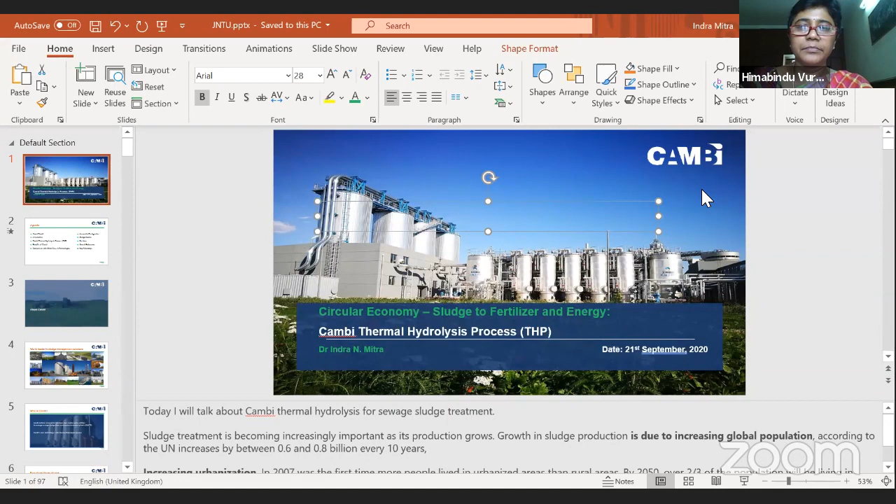Today's topic that I will be talking on is circular economy, sludge to fertilizer and energy. I will be mainly talking of Cambi thermal hydrolysis process. I work in this company as director, technical and project development.

Today's agenda: I'll start with a brief introduction, then we'll talk about Cambi thermal hydrolysis process, the benefits of Cambi, and compare Cambi technology with other technologies in the same field. We'll talk about anaerobic co-digestion, sludge centers, the services we provide, references, and key takeaways from this presentation.

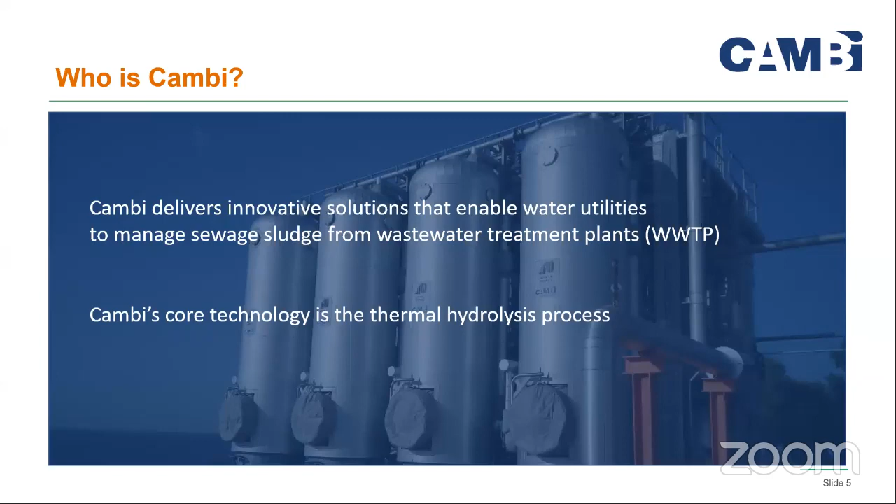Our core technology is thermal hydrolysis. Our work contributes to achieving 8 of the 17 United Nations Sustainable Development Goals. We are present all over the world, mostly in Europe and UK, with a lot of plants there. We process about 50% of sludge of UK. We also have plants in US, China, Singapore, and we are planning to come up with plants in India.

We won several awards, and among the top 3, we have been adjudged as the top 3 technologies of the decade in the wastewater space. We won the WEX Global Award in 2020, and we have been selected by the ETV program by Namami Gange in India.

Our headquarters is in Asker, Norway, and our workshop is in UK, and we have about 7 offices worldwide, mainly in Norway, UK, Spain, France, USA, China, Singapore, and South Korea. We are going to set up one in India.

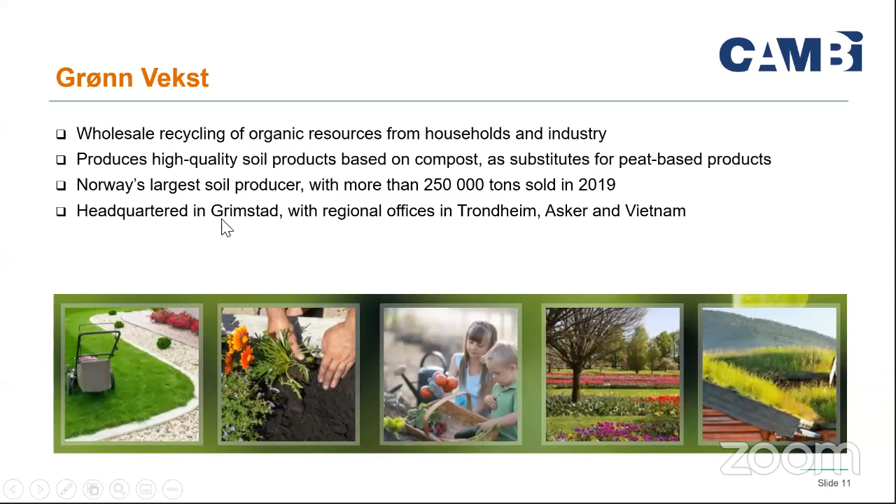Besides, Cambi also has a sister company, previously known as Hearst, now renamed Grønn Vekst. It works in converting waste into fertilizer, and it's Norway's largest soil producer, headquartered in Grimstad, Norway.

Sludge treatment is becoming increasingly important as its production is growing, mainly due to increasing global population, which according to the United Nations increases by about 0.8 billion every 10 years. The population in urban areas is increasing at an alarming rate, putting a lot of pressure on wastewater infrastructure in cities, so we have to build a lot of wastewater and water treatment. The sludge from wastewater treatment needs to be processed in the right way so we can recover all the resources from it. So you will see tremendous growth in the sludge sector.

There is a trend of increasing urbanization. In 2007, for the first time, more people lived in urbanized areas than rural areas. By 2050, we estimate about 2/3 of the population will be living in cities, leading to increasing expenditure in wastewater treatment infrastructure, especially in Asia and the developing world.

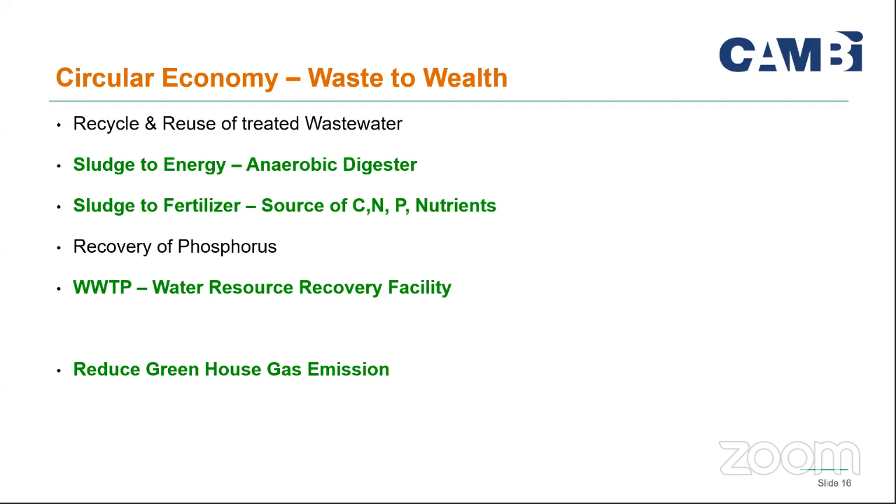One is in the wastewater sector. I'm talking about recycle and reuse of treated wastewater. You can treat your wastewater to a level where you can recycle and reuse it for different purposes like toilet flushing, gardening, cooling tower makeup in industries. Many plants in India, sewage treatment plants, are treating wastewater and giving it to industries. Also, I think the power plants are mandated to use recycled wastewater for their water needs.

So there is a lot of steps going on in India. Sludge to energy, anaerobic digester is a big thing where we convert the organics or the sludge into biogas, as I said before, and we can recover energy from there.

Then sludge to fertilizer. So far we have had a problem with sludge, and we were either landfilling it or not disposing of it the right way. We were giving it to the farmers, which is actually not healthy. I will discuss that in detail a little while. But if we can convert the sludge into fertilizer, then we can sell it.

This is where Cambi technology comes in, and it converts your sludge to fertilizer, and at the same time increases the energy production from the sludge in the anaerobic digesters by 20 to 50%.

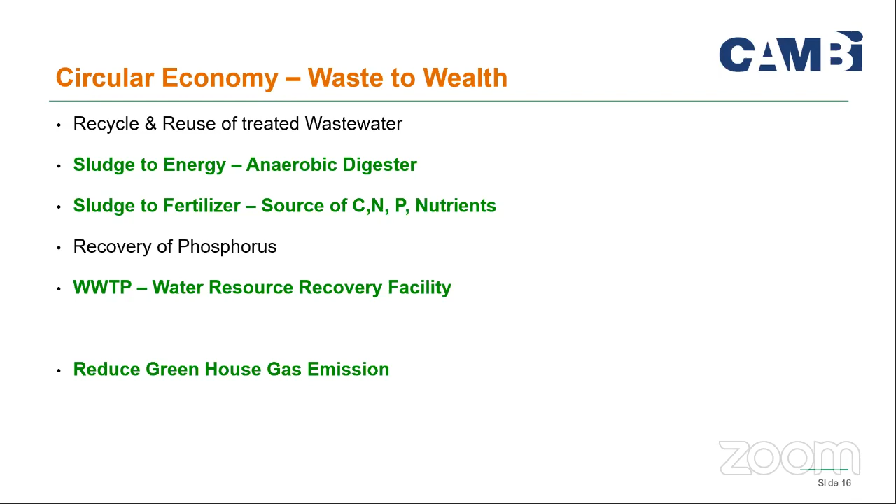DC Water is the municipality that handles Washington DC, and they have done extensive studies over the years, evaluating different technologies, involving a lot of universities. Virginia Tech was involved, George Washington University was involved to do a lot of pilot studies. And then ultimately, of all technologies, they selected Cambi THP.

The DC Water Program team is reinventing biosolids at this 391 MGD Blue Plains Advanced Wastewater Treatment Plant in Washington, DC, and has installed the first Cambi thermal hydrolysis process in North America. Today we have the eighth plant - we just got the order for that at WSSC in Maryland.

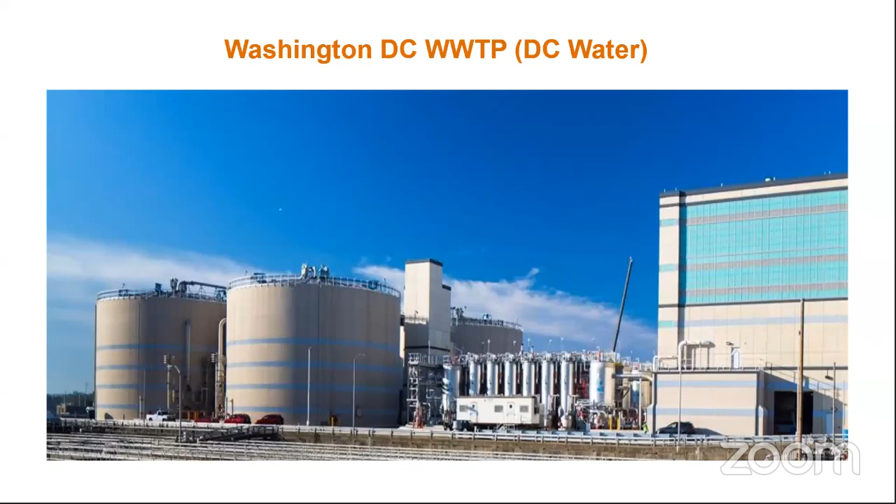Now sludge, as we know, we treat it, but then to what level we need to treat sludge and how to dispose it. It is governed by EPA biosolids rule. This rule is followed in USA, and many countries are following this rule, including India, where the new tenders that have come in follow the biosolids rule.

Just to give you an overview, this rule is applicable mainly for sewage treatment plants. The sludge, as you know, contains a lot of pathogens. As we are going through the coronavirus crisis, all this wastewater from the city, from houses, from hospitals treating coronavirus flows into your wastewater treatment plant. So this wastewater treatment plant contains pathogens, including coronavirus, and these pathogens separate into your treated water and the sludge.

The treated water, you treat by disinfecting the wastewater. But the sludge creates a huge problem, because just by disinfecting, it doesn't go away. It comes back again. So what we need to do is use certain technologies to kill these pathogens. I will discuss this in more detail.

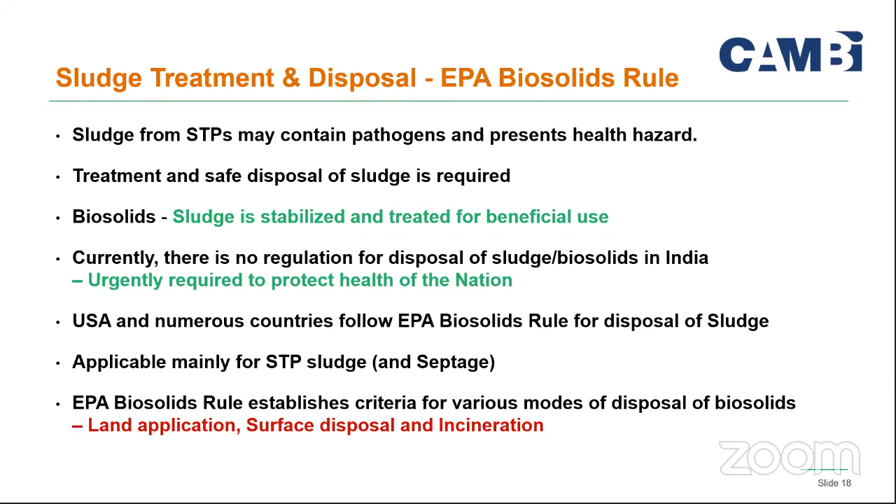Land application means you basically use the sludge as a fertilizer and recover the values attached with it. Land application is preferred because it promotes circular economy - recycle and reuse of biosolids. Biosolids are a source of carbon, nitrogen, phosphorus and other nutrients, so they can be used as a fertilizer.

To be land applied, there are three criteria. One is the concentration limit for 10 heavy metals. The second criteria is you have to meet vector attraction reduction, meaning the volatile solids in your sludge need to be reduced by 38%. The regulation gives 12 options, but anaerobic digestion is the most commonly used process, where you not only reduce volatile solids by more than 38%, but also generate energy out of it.

The third criteria is you have to meet pathogen reduction. Based on your level of reduction, your biosolid will be called class A or class B. When the biosolid is treated to achieve less than 1000 MPN (most probable number) of fecal coliform per gram of dry solids, or density of Salmonella species bacteria less than 3 MPN per 4 grams of dry solids, we call it class A. Otherwise, we call it class B, for fecal coliform up to 2 million MPN.

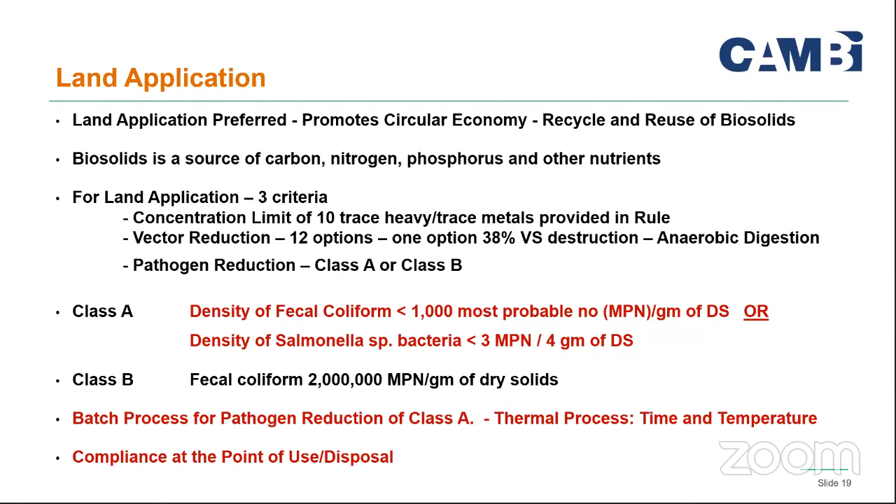Before it is discharged, but in the sludge we cannot just do disinfection. So the sludge that comes in, first primary sludge and secondary sludge - first option is we do thickening and dewatering. It is not a treatment, it is just taking out water. About 2-3% of solids comes out from primary clarifiers, and secondary clarifiers of 0.8 to 1% solid.

It goes into the thickener, and they thicken it to around 4 or 5% solid, and then it goes into the dewatering equipment where they further dewater it to about 18 to 20%, 25% solid, depending on the dewatering machine you are going to use. So all you are doing is there is no treatment. You are just squeezing out the water and making the volume of sludge to be disposed of reduced. So initially you might have 1% and it is going out at 20% solid, meaning you have reduced the sludge volume by 95%.

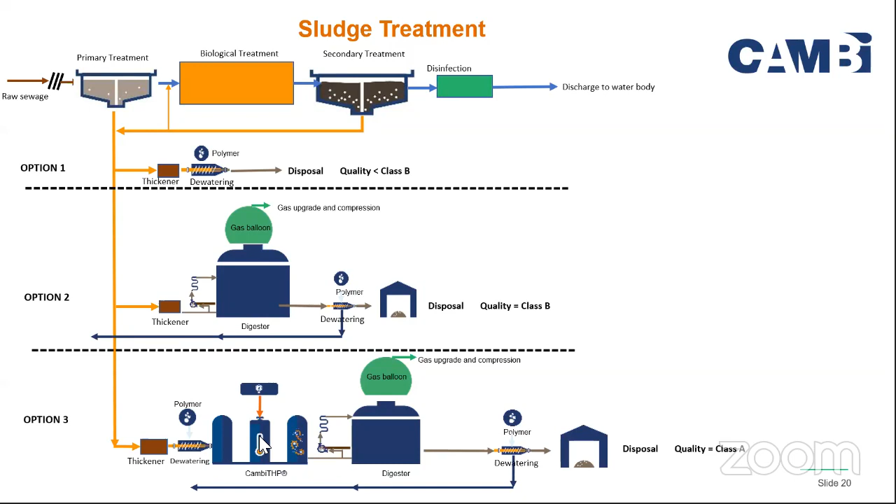We'll discuss this in detail. So now, what is the CAMBI thermal hydrolysis process? It is nothing but a pressure cooker. The sludge, as you know, is very hard to degrade, so we subject that sludge to 160 degrees centigrade at 6 bar pressure. By doing that we get certain advantages, which we will discuss.

So it's a two-stage process where we high pressure boil the sludge, like you have a Hawkins pressure cooker - you just cook it, it's a pressure cooker in steel tanks. We cook it with steam at 160 degree centigrade and 6 bar pressure.

After doing that, we have another unit where we allow the sludge, which is at 6 bar pressure, to suddenly be exposed to atmosphere. This process is called steam explosion. The pressure drops suddenly from 6 bar to 1 bar, sudden exposure to atmospheric pressure. Now this creates a lot of pressure in the bacterial cells, which ruptures the cell wall.

As you know, the cell wall is very hard to degrade and it doesn't come out easily. So the cell wall ruptures, and the cytoplasm and all the degradable material that was enclosed within the cell wall comes out and makes the sludge much more biodegradable. In addition, all bacterial cells have EPS, extracellular polymeric substances, which retain a lot of water. Because this extracellular polymeric structure is totally destroyed, the water comes out, and as a result, dewatering is much easier with THP sludge, which we will discuss in detail.

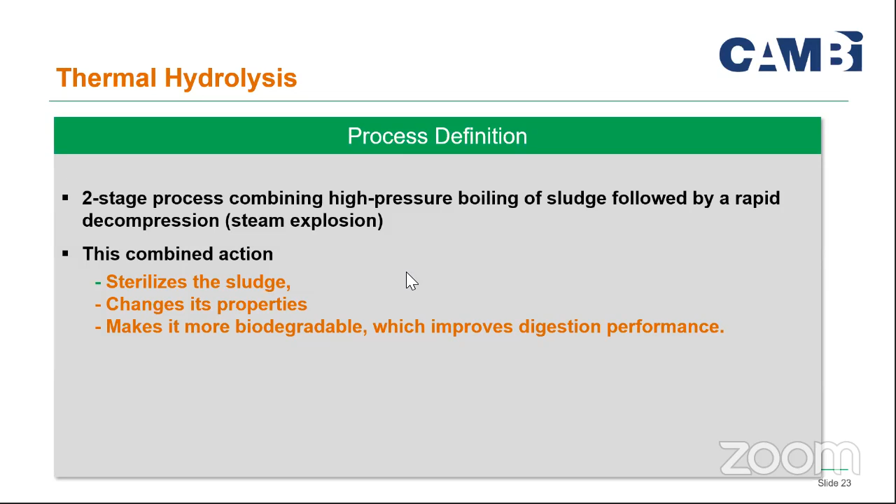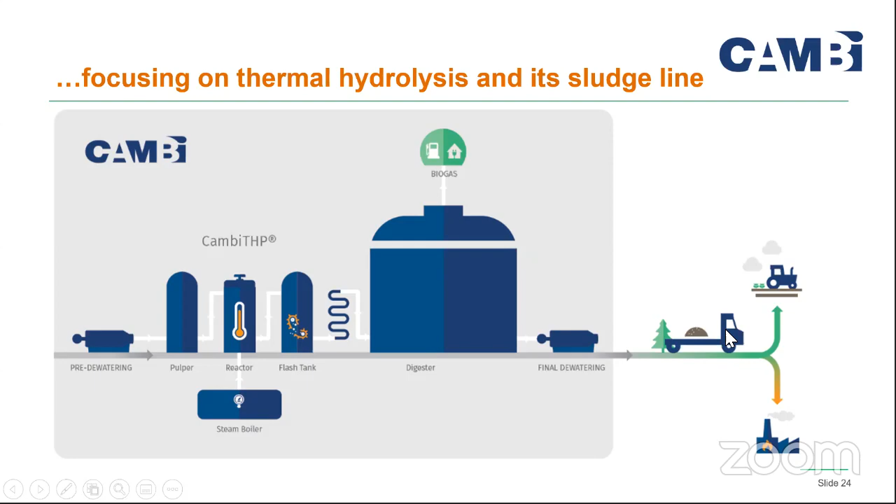This is another way of showing it: this is your primary sludge coming in, this is your secondary sludge. You dewater it, then store it if required, sometimes in a sludge silo. Then it goes into the THP system: the pulper, the reactor, and the flash tank. Since the reactor is at 160 degrees centigrade and the digester is at 37 to 40 degrees centigrade, you need to cool down the sludge to maintain this temperature. Then you dewater it and it goes out, and the steam is injected from the steam boiler, generated from the excess biogas produced within the digester. So it does not require any additional energy for generation of steam. That is the beauty of the process. In fact, once you install it, you get a net production of biogas, which I'll explain.

So this is the schematic: pre-dewatering, then the thermal hydrolysis process, then into the digester. As you can see, this digester will generate biogas. If you put this in, a conventional digester will generate 20 to 50% extra biogas, of which only 5 to 15% will be used in the steam boiler, and the rest will go into the CHP. 90% of the steam is generated from the flue gas that comes from the CHP; only 10% of the steam is generated from this biogas. So this flue gas, which you would have thrown away anyway, is now used to generate steam. So there is no extra energy required for steam generation. That's the beauty of the process.

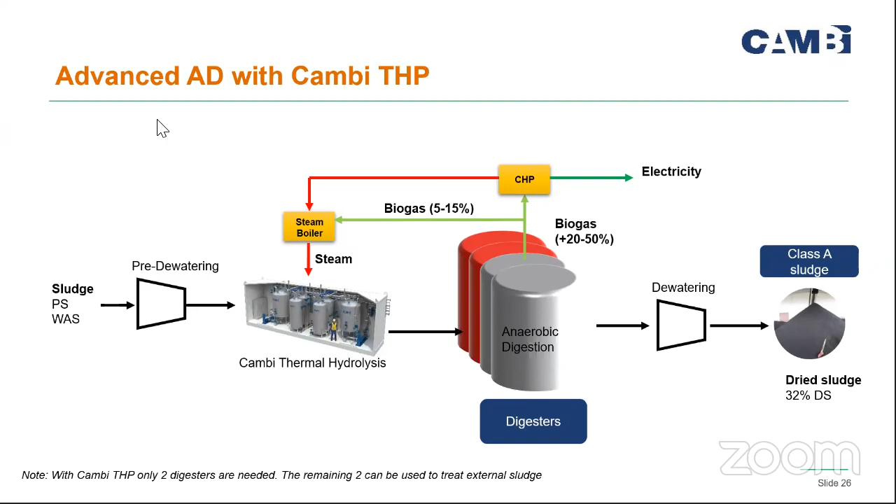This is the equipment that is going. You need a sludge dewatering unit. You need the THP system.

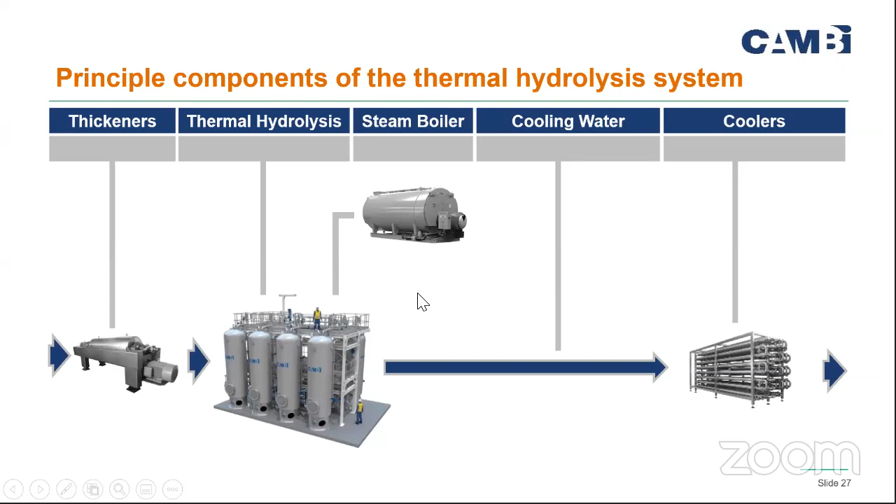This is the THP. You need a boiler, steam boiler, and these are the coolers, because the temperature needs to be reduced coming out, since the temperature coming out of the THP is very high, and then it needs to go into the digester.

So this is a video of how the system works. You see the sludge is coming out. We dewater it to 16 to 18% in the pulp vessel.

Here the sludge is heated with steam, and then it goes into 4 tanks. It can be 3 or 4.

And these are all operated in batch, because that is required by regulation, that it has to be a batch process, because some of the particles, if it is a continuous process, then as you know, in non-ideal situations which we will encounter in real life, some of the particles may not stay for the time equal to the detention time, and they may escape.

So this has to be operated in batch process to ensure that it stays for 20 to 30 minutes in this tank. So these tanks hold it for 20 to 30 minutes in the reactor, and then the sludge goes out. So feeding is continuous, exit is continuous, but the reactors are operated on a batch mode.

Now this is going into the flash tank, and suddenly this sludge is exposed to atmospheric pressure. This is what we call steam explosion.

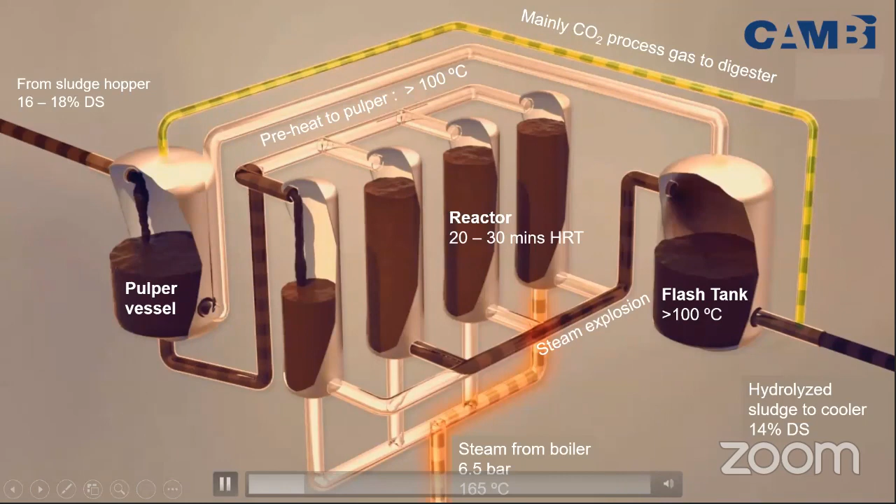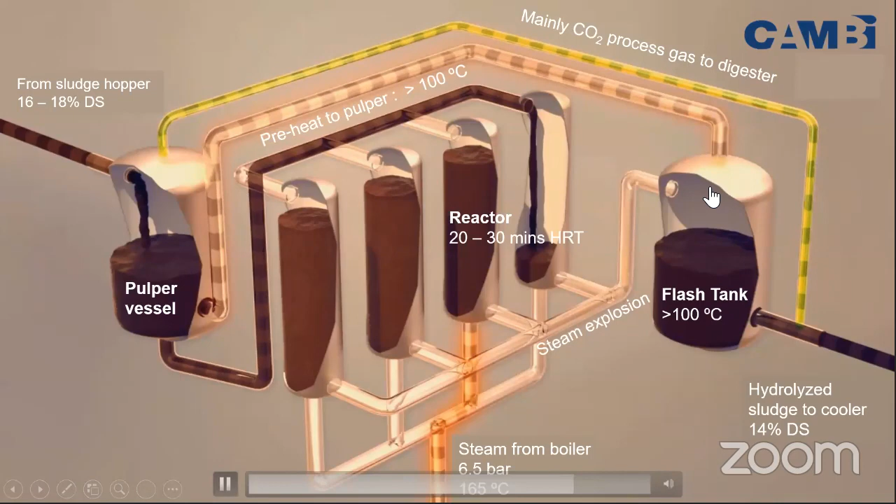Because of that, all the cell walls and all the EPS get destroyed, and it improves the performance of the digester tremendously. And the steam that is generated is recycled back into the pulper to preheat it.

So we are capturing the heat to heat this pulper, and everything is then collected and sent to the digester. So this is the steam that is going in from the bottom, and it goes into the reactors.

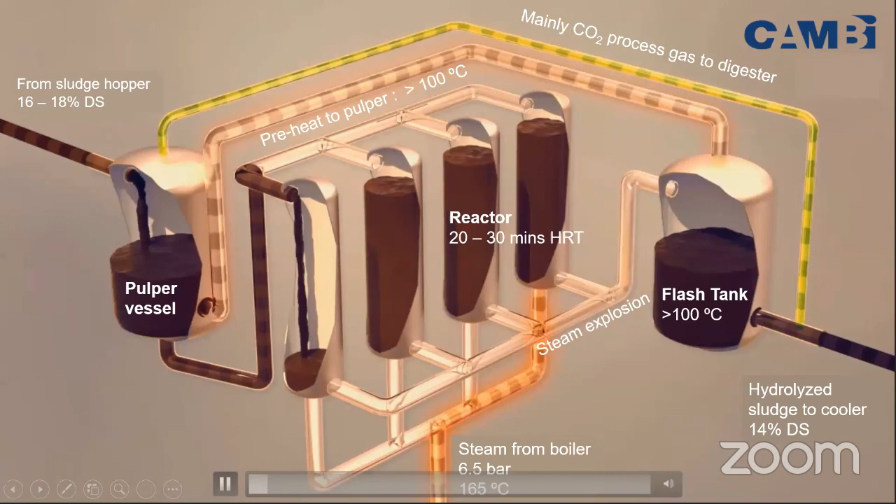We supply in different modular forms. We have modular systems - basically three models: B2, B6, and B12, and these are of different sizes depending on how much sludge you want and depending on your facility.

So if your dry solids is up to 25 tons, we go for B2, and if it is up to 95 tons, we go for B6, and if it is at 112 tons, then we go for B12.

This is an everything comes in - we assemble everything in our workshop, and we just ship it to the facility.

This is an example of how installation is done at the facility. Everything comes, everything is done, and it's the entire installation. This was in Texas - in 4 days, the entire system is installed. So this is just a video to show how the installation is going on.

So everything is prefabricated and is transported.

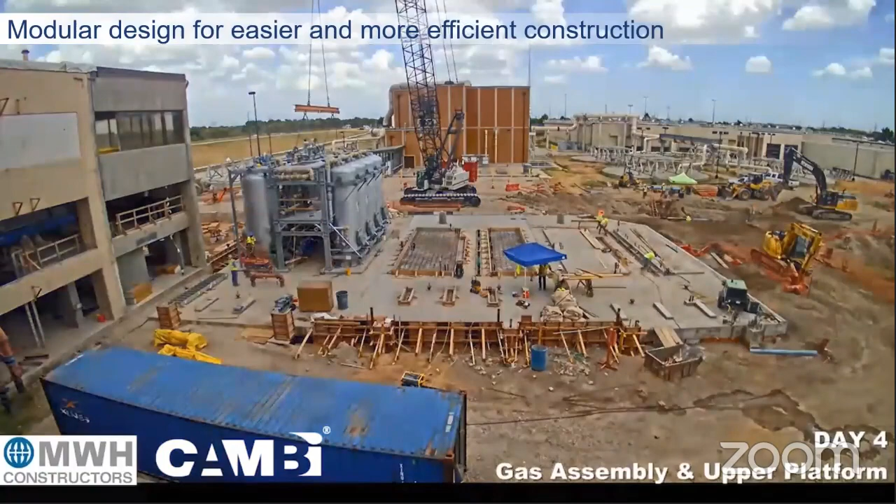Okay, next we go. So we understood what CAMBI is and how the process works. Now let's talk about the benefits of CAMBI.

Treating sludge typically can cost up to 50% of the operating cost. So if you want to reduce your OPEX, you have to focus on your sludge treatment.

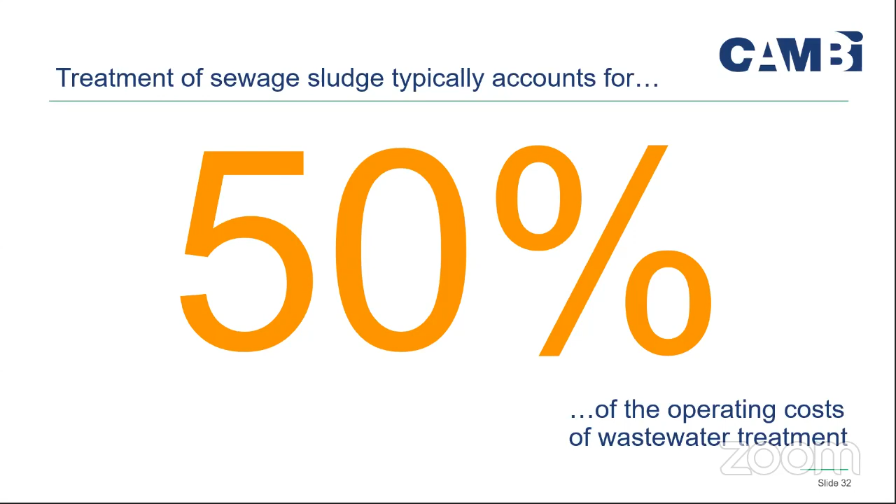So you need to select a technology, and obviously you will be looking for a technology with the following criteria. First of all, it has to be 100% compliant with any regulation that is there. It has to be low cost, and the technology must be sustainable.

And preferably it should be compact. The whole world is going for compact systems, and land costs in India are extremely high, especially in the cities, and there is hardly any space. So low footprint is very much important.

And then you will have in the cities all these wastewater treatment plants, with buildings around them, so you want to make sure there is no odor. There are a lot of lawsuits in Western countries because of this odor. So this is probably, I would rank it number one or number two - it has to be compliant with regulation, then it should not have odor.

And preferably it should promote circular economy, so we can produce sludge which we can recycle and reduce. And today's trend is reduction of carbon footprint, which is very much required to protect our planet.

Okay, so now we have a sludge, and we are subjecting it to 160 degrees centigrade at 6 bar pressure. Because of that, three things will happen. One, it basically sterilizes the sludge. Remember, sludge is sterilized at 122 degrees centigrade, and we are doing it at 160 degrees centigrade. So definitely it sterilizes the sludge. It produces a Class A product, meaning a pathogen-free product, and it's of very high quality, which can be used as a fertilizer or soil amendment or conditioner.

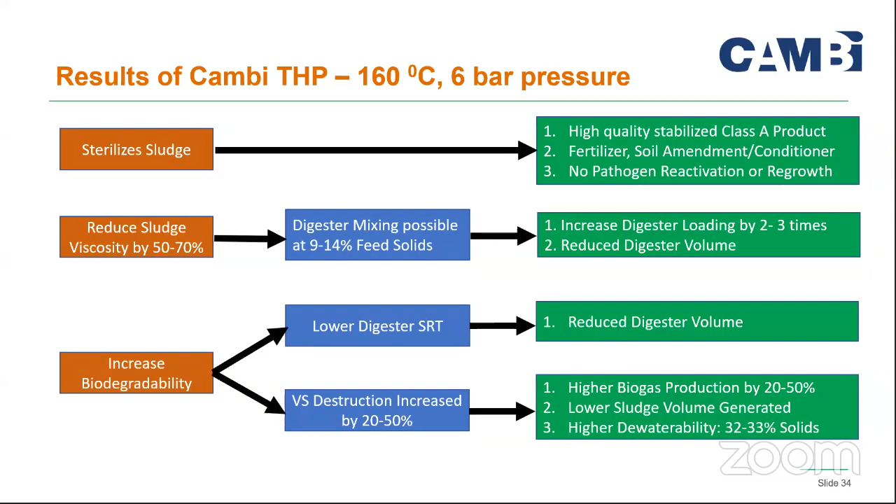So viscosity - just to show you what I was talking about, it reduces the viscosity. You can see this is before the THP, 16.5%, and after THP, it's like a liquid. Same sludge, 14% solids - it's like a normal sludge.

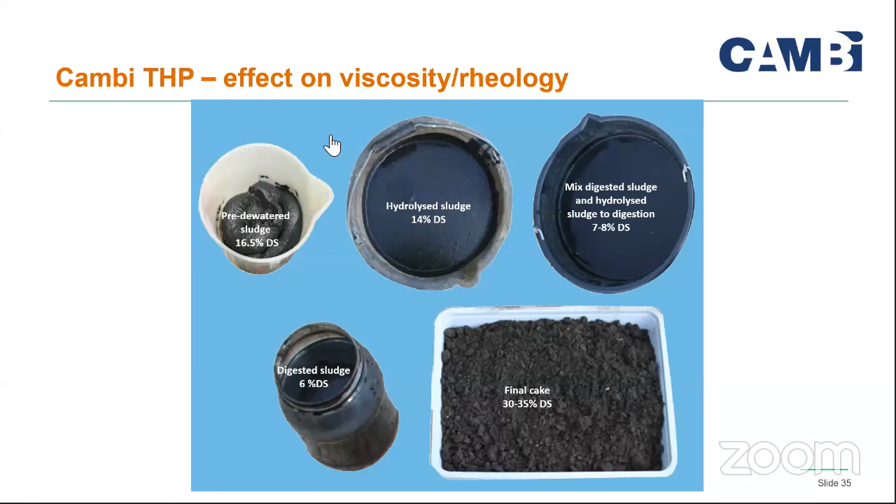So then, what are the benefits of using THP? You get 100% compliance with your regulations. You have a circular economy, because you are producing a sludge that can be reused as a fertilizer, and you are also generating more biogas, by 20 to 50%. Your capex is reduced because you're saving on your digester volume, and opex is reduced by 50% because you are generating more biogas and generating less sludge, and also your digester volume is reduced.

So you have reduced digester mixing requirement, and because sludge is more dewaterable, your transportation cost is reduced because the percentage solids in your dewatered sludge goes up from 18 to 20% to 32 to 33%. So the volume of sludge to be hauled is reduced. It has the lowest life cycle cost, and you will get a payback period of 5 to 10 years.

Meaning after 10 years in your sewage treatment plant, you will be running a plant and getting a much better product, which you can actually sell to generate revenue. But your operating cost is also reduced by 50%. So that's a very, very win-win situation.

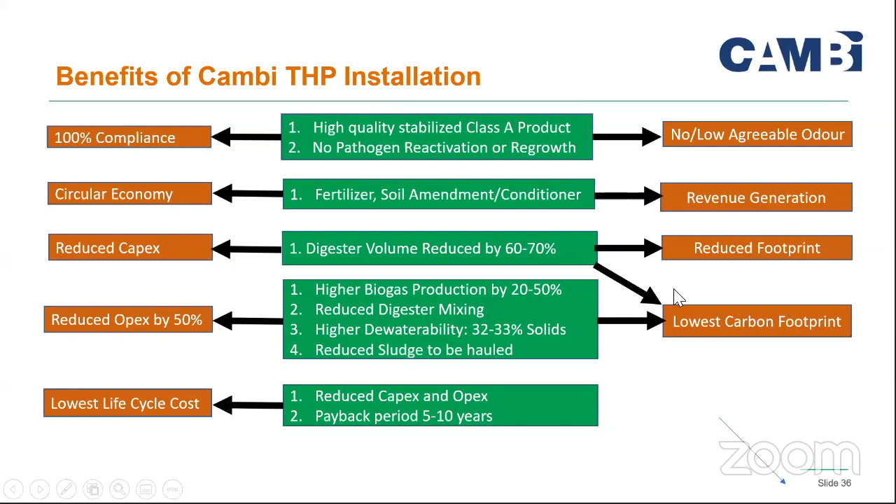The sludge that you get, you can generate revenue out of it by selling the sludge as a fertilizer, and you will have reduced footprint. Your digester volume is reduced, and the lowest carbon footprint the process generates.

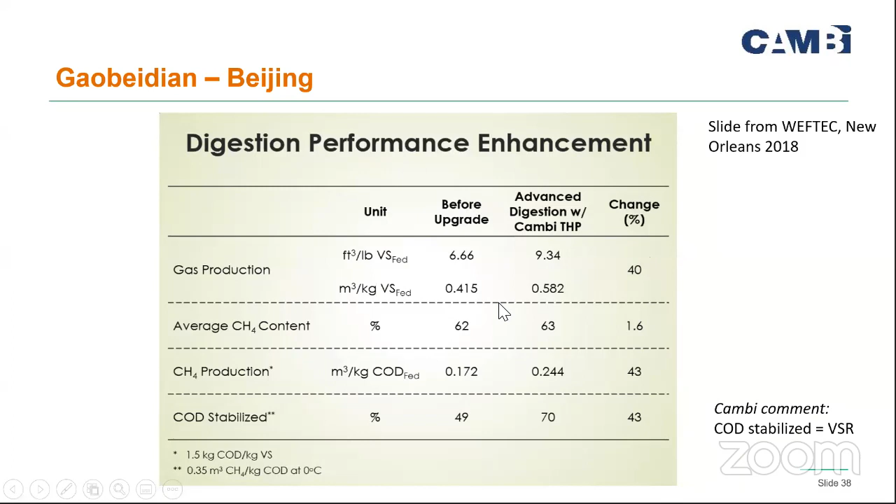This is a plant in Beijing. You can see gas production has increased by 40% after they installed it. Before it was only digester, now it is THP plus digester. Methane production has also increased, and the volatile solids has also increased. So it is in line with what we saw in the previous slide in UK.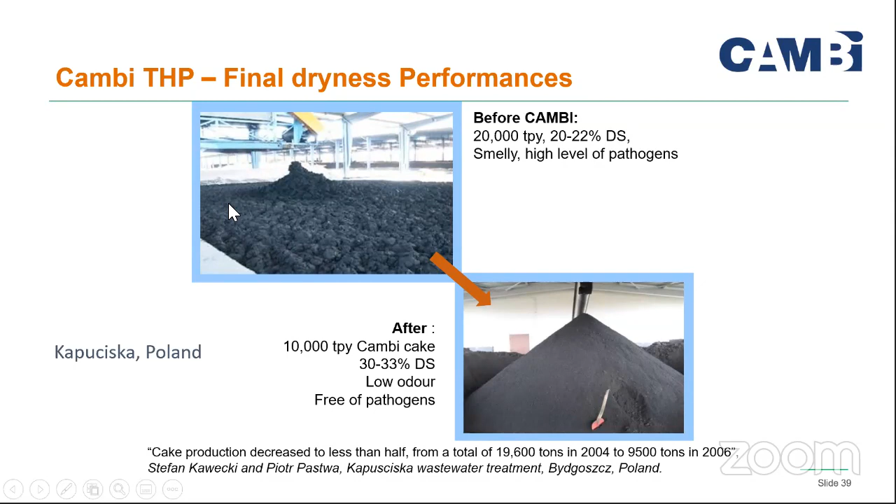This is another plant. Before THP, they used to produce 20,000 tons per year at 20 to 22% sludge. Now, after installing the same system, they produce 10,000 tons per year of Cambi cake at 30 to 33%, and there is practically no odor or low odor, and it does not have any pathogens. This is a plant in Poland, and you can see the picture, the difference in the quality of the sludge.

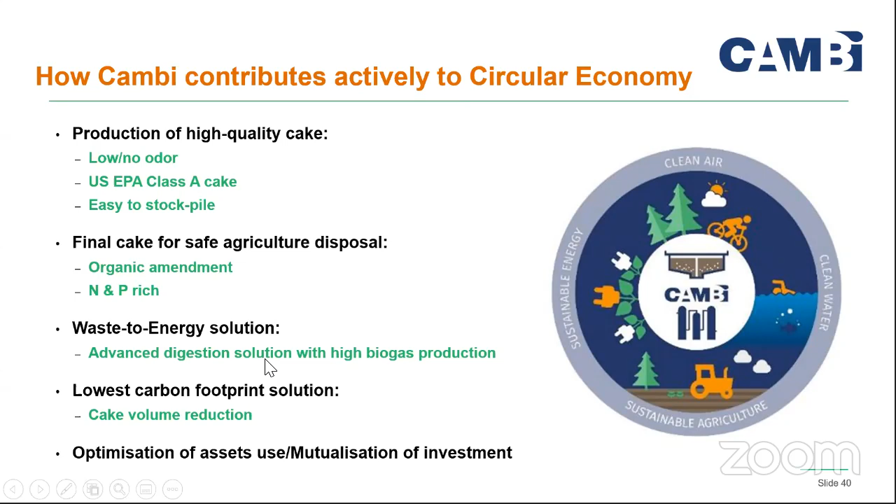Cambi contributes actively to circular economy. It produces high quality cake that produces fertilizer. It has no odor. It is used for agriculture. It produces energy, increase in energy, lower carbon footprint, and optimization of the assets.

The reason for that is we have been using fertilizer which are mainly inorganic, and urea constitutes about 70% of that. So the urea, so all these inorganics are degrading our soil. And this needs to be supplemented with carbon, and sludge is a product from sewage treatment plant.

Where people were finding ways how to get rid of it.

So now you have a product which you can sell. Municipalities can use this sludge, and every year a municipality spends hundreds of crores buying fertilizer for the upkeep of gardens, playgrounds, and roads within the city itself. Now they don't have to. They can save that money and use it, and that is very much required. The Government of India is giving a lot of pressure, encouraging the change over from inorganic fertilizer to organic fertilizer, and sludge is a very good option for that.

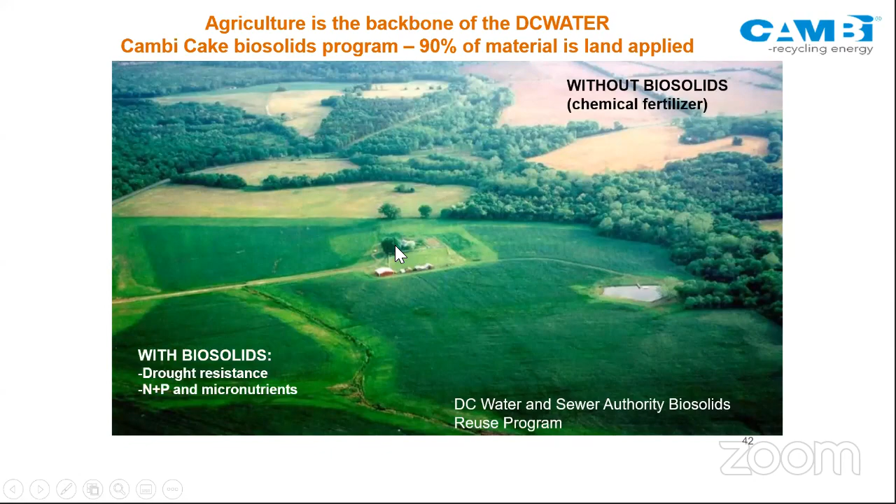This is a company that Washington DC uses for selling their sludge to farmers. It's called Bloom, and you can go to bloomsoil.com to get more information about that facility. It's practically done by almost all utilities that have used our product.

This is one of the workers, an operator of DC Water, and he uses this Bloom product in his home. We got it from one of the articles where he wrote this, and you can see it is sold in retail shops like here, similar to Home Depot, where it is packed in bags and then sold to people who come and buy it.

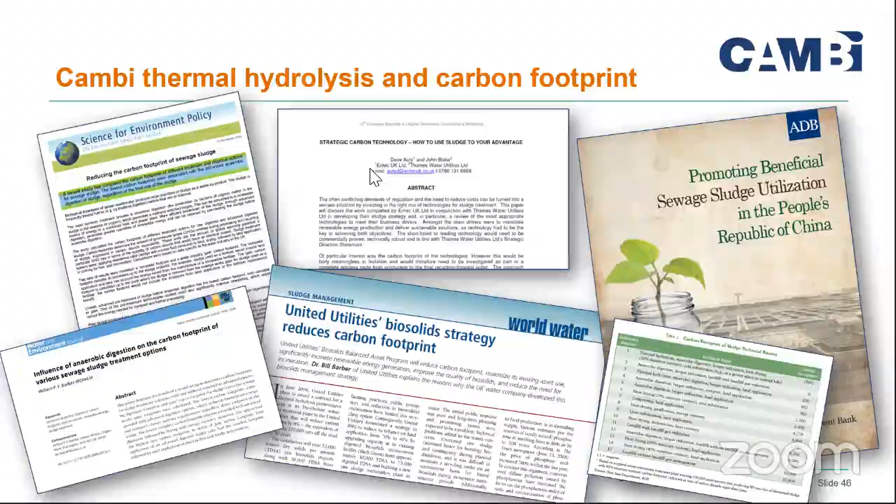Odor complaints are a headache for many utilities, and nobody wants to basically stay in a place where there is a lot of odor. So our system, THP, generates very, very low odor, and that is a big thing. Carbon footprint is another big thing that everybody is looking for. We have to encourage technologies that reduce carbon footprint, and Cambi is the leader, probably number one in this field for carbon footprint.

These are other technologies. This is called TPAD, pasteurization and drying. These are also good technologies, but these two technologies have a potential for regrowth.

Regrowth means they meet class A, but after they store the sludge for a few hours, or during dewatering, after the digester, the pathogens come back again. There are a lot of facilities suffering from this, and they have to upgrade their system. So this too becomes a little risky to achieve.

There are about 60% or so mentioned in that article. In the US, people have surveyed all the facilities and found that a certain percentage, about 60% or so, of these TPAD and pasteurization facilities are not meeting class A. Remember, you have to meet the class A requirement at the point of use, meaning after the STP, where you take the sludge to the land where you're going to apply it. It has to meet the requirement at that point.

During storage, dewatering, and transportation, the bacteria and pathogens actually grow back. You don't see such issues with drying, and absolutely not with Cambi. But the only problem with drying is that it's very electricity intensive. It requires a lot of power and energy. Its operating costs are huge, and maintenance costs rise drastically after 5-6 years.

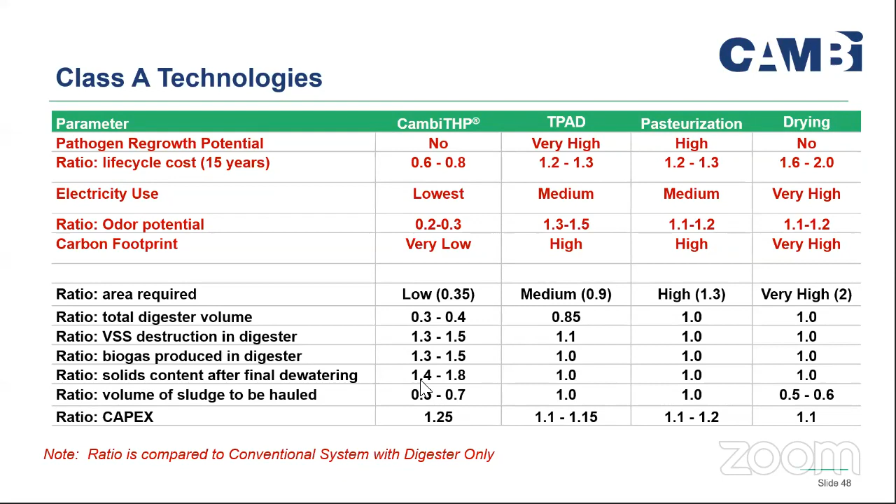Many facilities are switching over to THP from drying, and we'll discuss that. These are all the advantages. You can see the area requirement is very low for THP, so it's a no-brainer. We are the market leader, or THP is the market leader, and Cambi covers 80% of the THP market. You can see the digester volume is less, biogas production is high, and volatile solids reduction is high. It's a very good technology to follow.

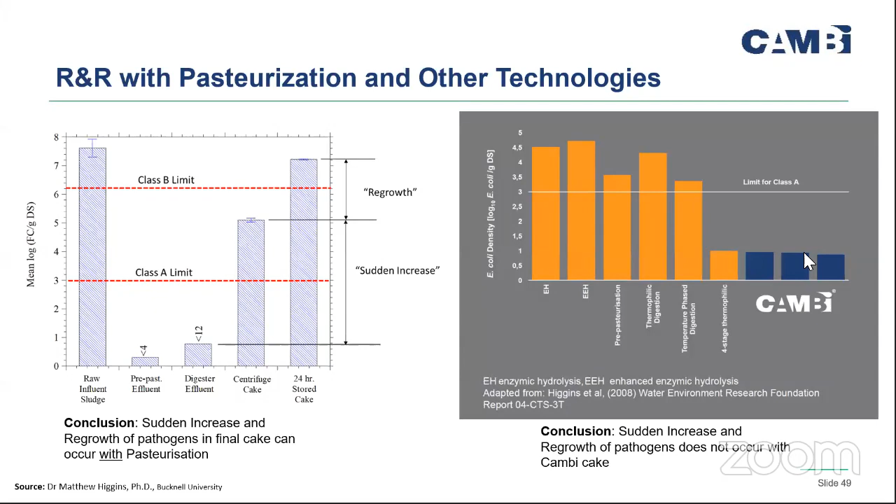Within 24-hour storage, it even crosses the class B limit. So this is what we call a sudden increase, reactivation and regrowth phenomenon. You can see this is practically the same for most technologies, like enzymatic hydrolysis processes, and they suffer the same thing, except for CAMBI. You can see CAMBI maintains that level, so even after 5 days, you come and check, it is still there.

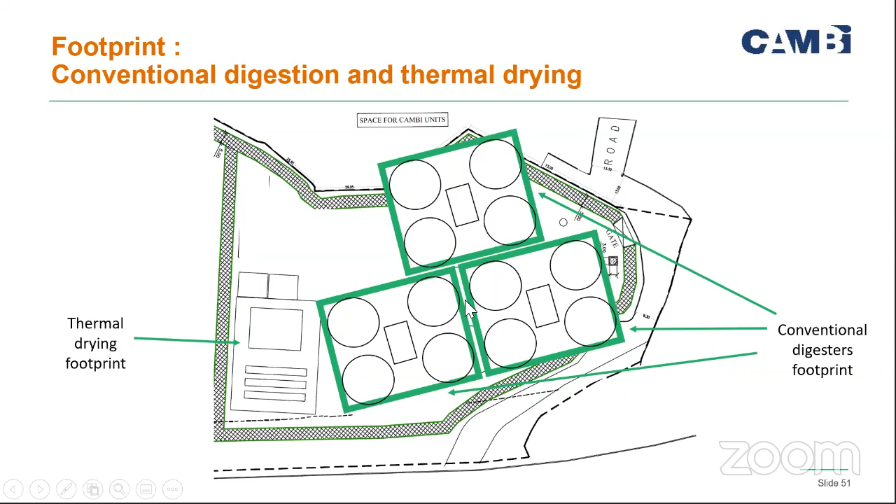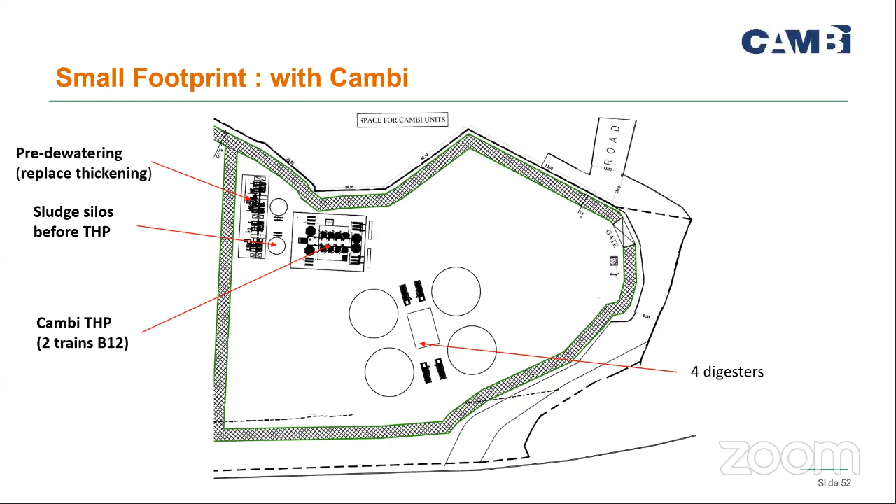But with CAMBI, if you put it in, you save on the drying space definitely, and it's just a small space. Instead of 12, now you require only 4 digesters, because CAMBI cuts the digester size by 60 to 70%. So you save a lot of space, and this is a big thing, particularly in cities like Mumbai, Delhi, Bangalore - any big city.

This becomes a big issue. This is one of the places where the client was initially using drying, then they got fed up with it because there were a lot of maintenance issues, and they got rid of the drying and built the CAMBI THP there. You can see it requires such a small space, and because CAMBI THP is there, it requires only 4 digesters. That's the big thing.

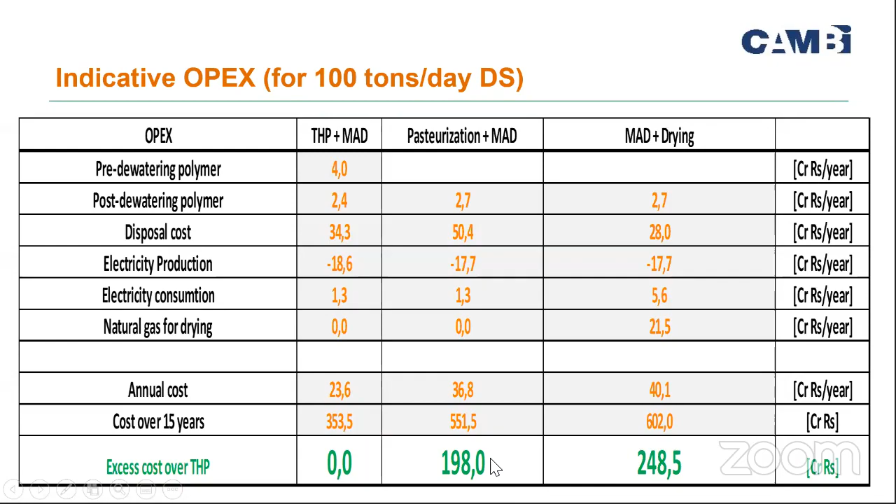Okay, I will have to rush because not much time is left, I guess. I'll talk about anaerobic co-digestion.

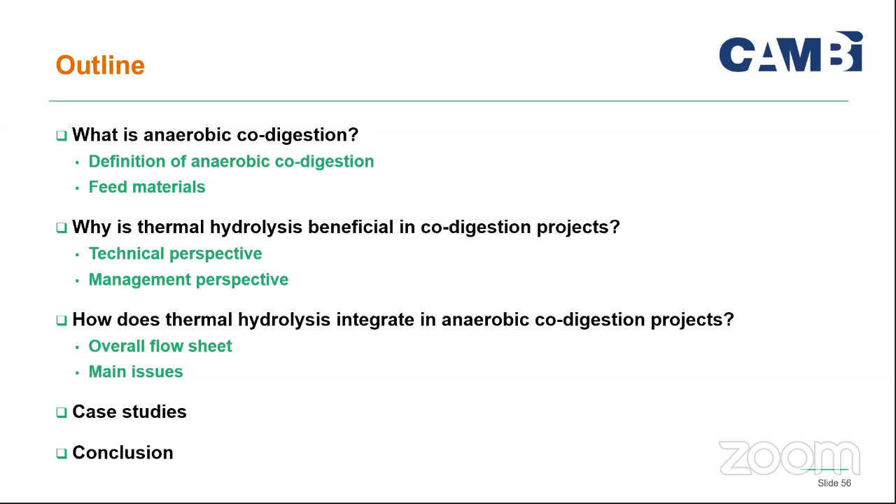This anaerobic co-digestion, we will discuss what it is and how thermal hydrolysis brings in beneficial uses, how it integrates into the system, and what are the case studies and conclusions.

Anaerobic digestion is a collection of processes by which you use microorganisms in the absence of oxygen to degrade an organic product, whether sludge or organics. This generates a lot of energy in the form of biogas, and it stabilizes the material by removing volatile solids. If you didn't do anaerobic digestion and put the material on land, the volatile solids would degrade and generate methane in the open. By doing it in the digester, you basically stabilize the sludge.

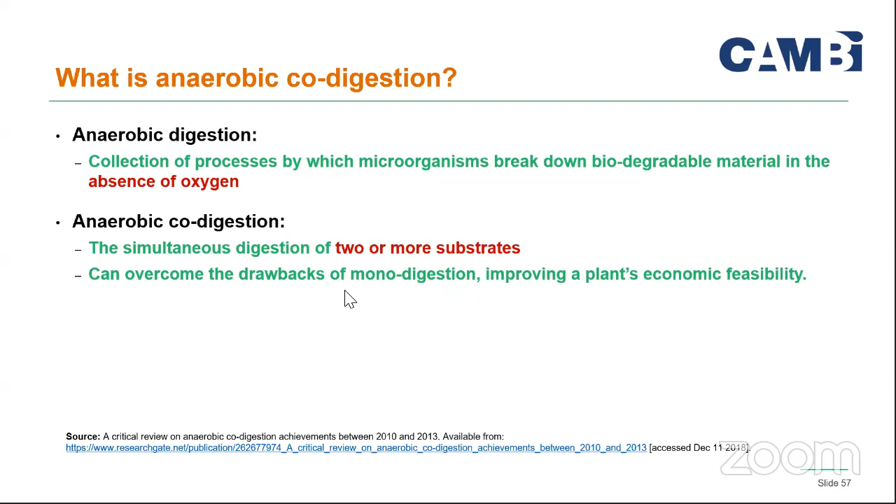What is co-digestion? It's where you have two different substrates - one could be sludge, another can be food waste. You have a mixture of two or more. It helps in certain areas because one feedstock might have certain restrictions which the other feedstock can supply. That's why co-digestion is very important.

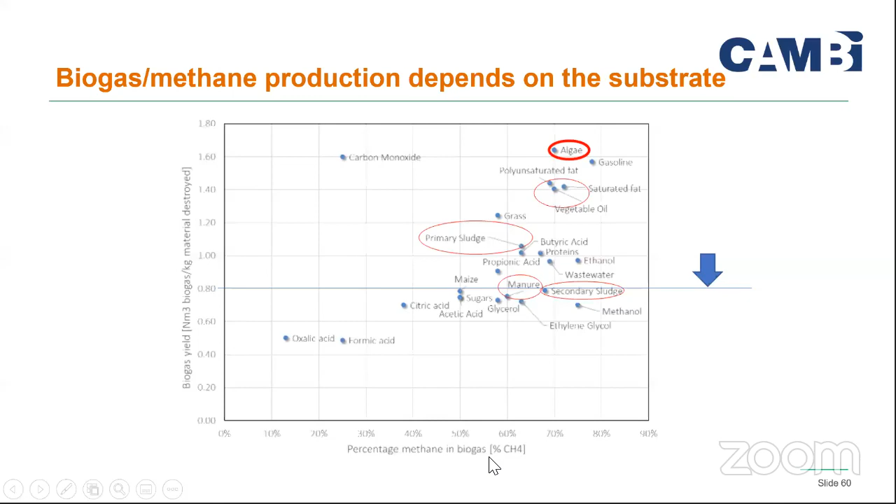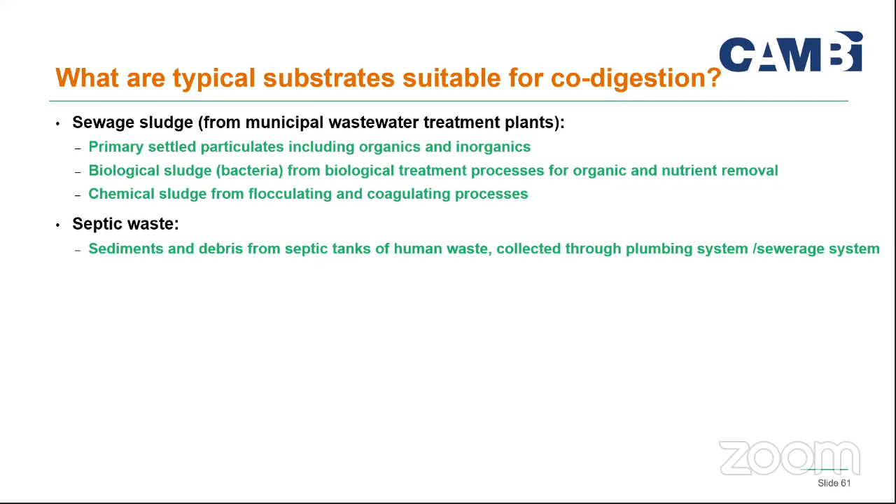So what are typical substrates for co-digestion? Sewage sludge, septic waste, bio-waste, food waste, manure, and biomass. You can put in other things also, but we need to try it out.

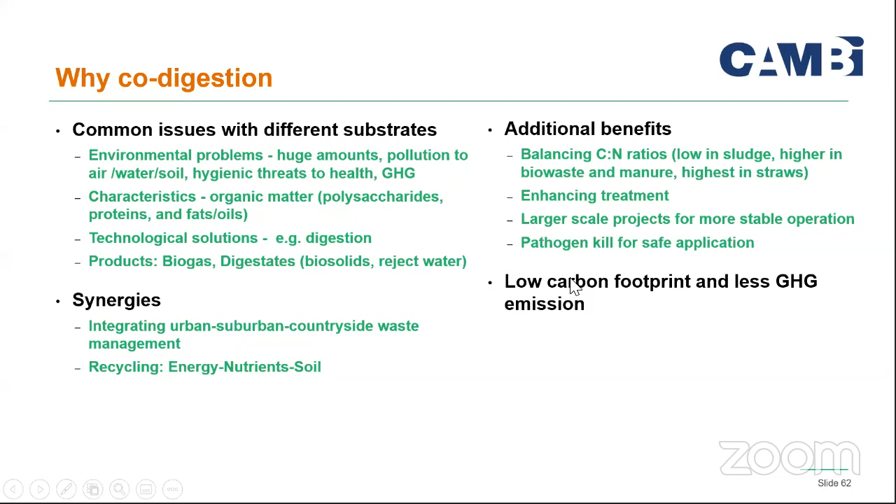As I said, why do we do co-digestion? Because there are certain environmental problems, maybe due to pollution. The characteristics of the organics may complement each other - there are technical solutions for that, and there might be some synergies. You also want to balance the carbon and nitrogen. A lot of things go into this, and one last thing will always be a reduced carbon footprint or less greenhouse gas generation.

So what value does THP bring for co-digestion? It's the same as we discussed before - the benefits remain the same. It stabilizes, reduces the water content, kills pathogens, increases biogas production, and enables using resources.

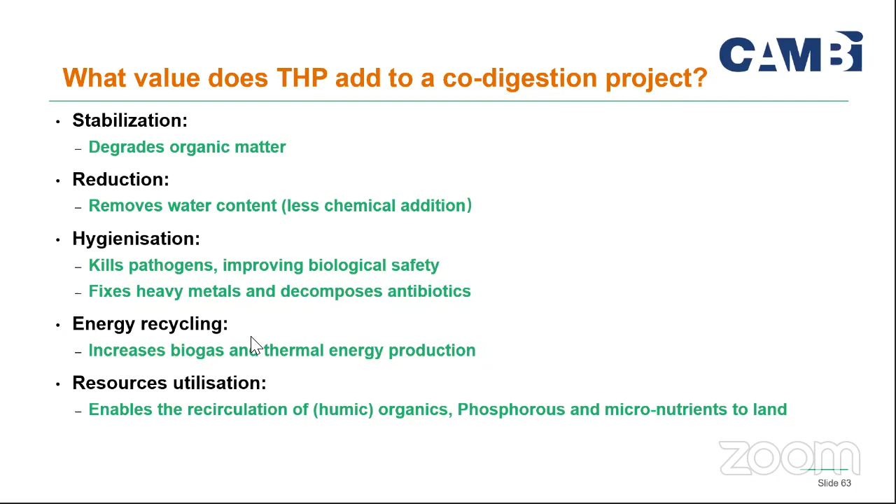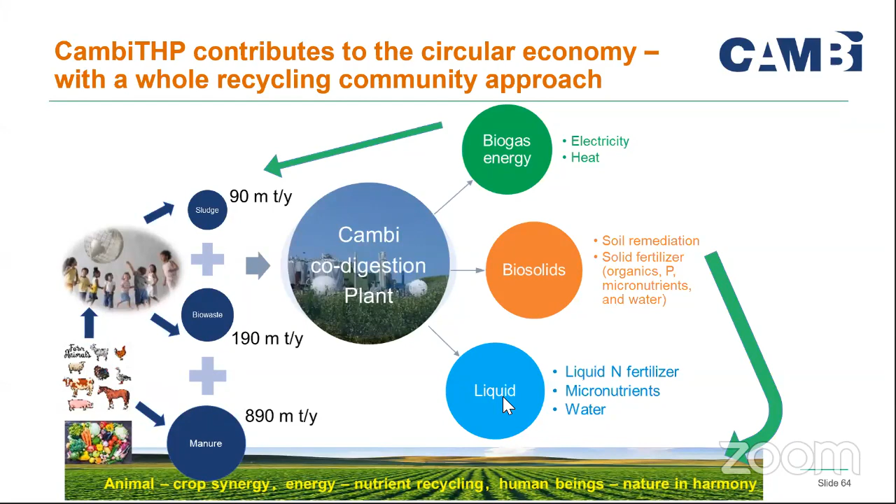This picture shows manure plus bio-waste plus sludge going into a Cambi co-digestion plant, producing different types of products: biogas, energy, biosolids, and liquid which you can later use for recovery like phosphorus. You can also use it as liquid nitrogen since it has a very high nitrogen value.

As before, it has no pathogens - it's a class A fertilizer. The sludge produced has no bad odor, is easy to handle, and biosolids are about 30 to 40% dry solids. This can be marketed as soil improvers and fertilizers.

We have discussed this - it's the same thing. We have one sister company, Høst, now renamed as a new company. They basically take sludge from Norway and export it to Vietnam. It's a multi-million-dollar company.

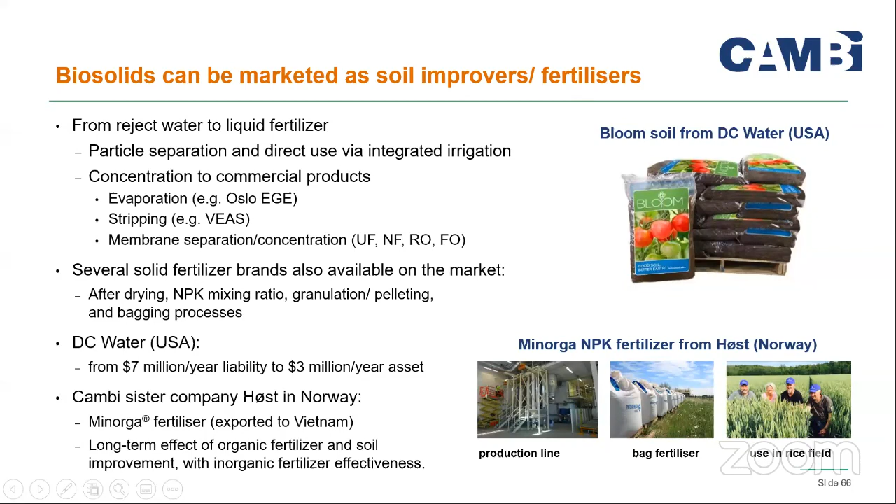So waste comes in, you dewater it, you do thermal hydrolysis, digestion is the same thing. Typically, 1 cubic meter of biofertilizer will contain about 8 to 10 kg of nitrogen and 1.2 to 1.3 kg of phosphorus, with negligible odor. So these are the things.

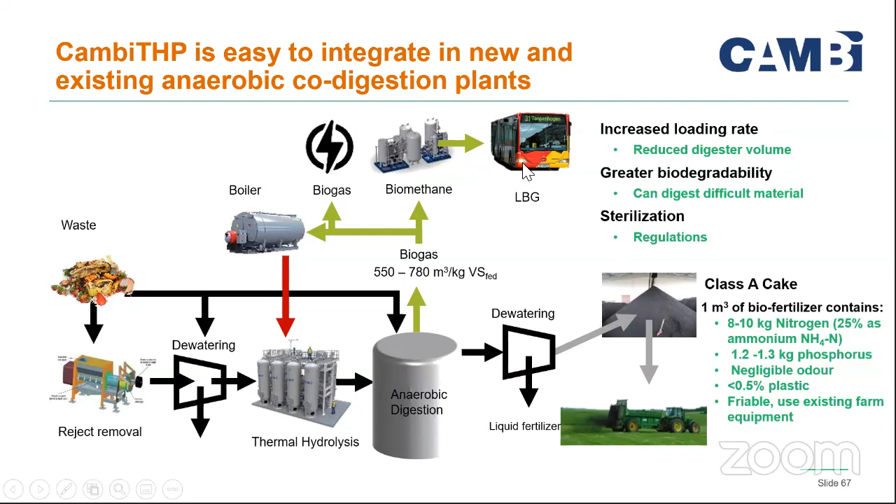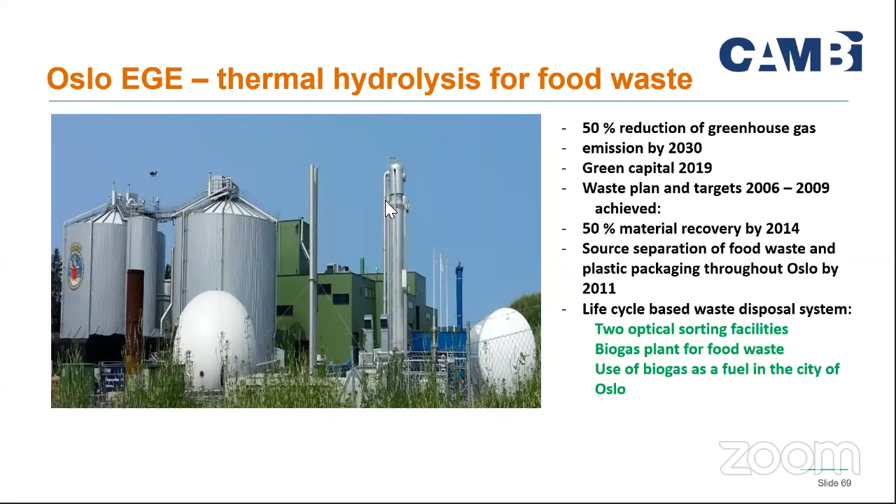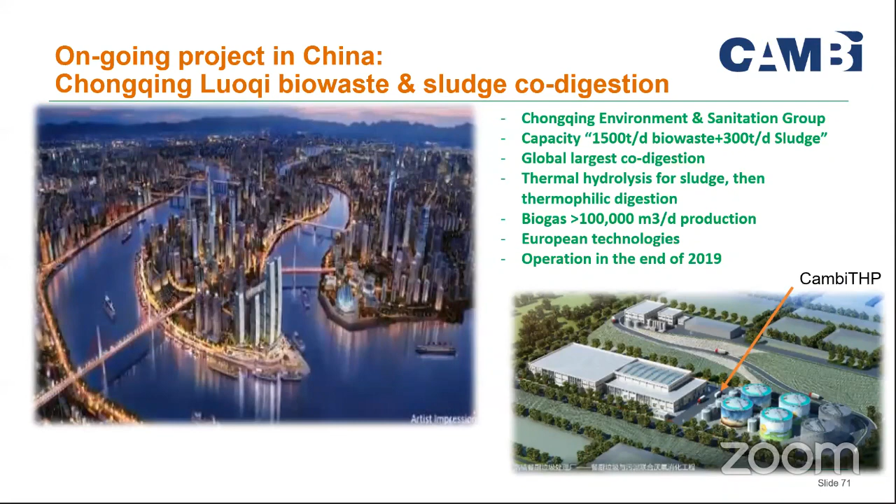So we can conclude that CAMBI THP is a very good technology for co-digestion, and we already have demonstrated plants. It increases biogas, produces biofertilizer, and reduces greenhouse gas, same as what we discussed under benefits, and it can be available for various feedstocks.

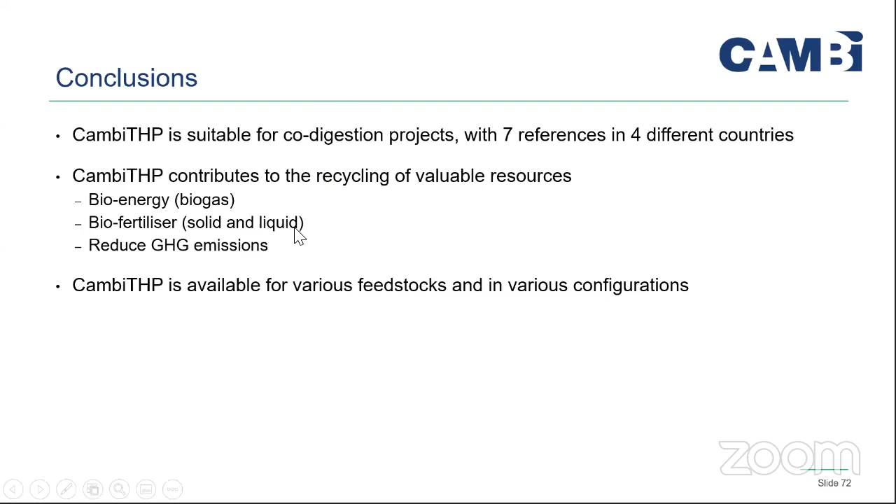Another concept we want to discuss is the sludge center. This means in a city, instead of having sludge processing at one sewage treatment plant, it can take in sludge from other sewage treatment plants or facilities. So you can have the sludge center at one of the sewage treatment plants, or it can be decentralized - one option is on-site, another is decentralized, meaning you have a separate area for the sludge center.

We have several references for sludge centers in Europe and China. In the wastewater treatment plant, it receives sludge from other STPs and processes it there, or it can be a dedicated sludge plant which receives and treats sludge from different external sites.

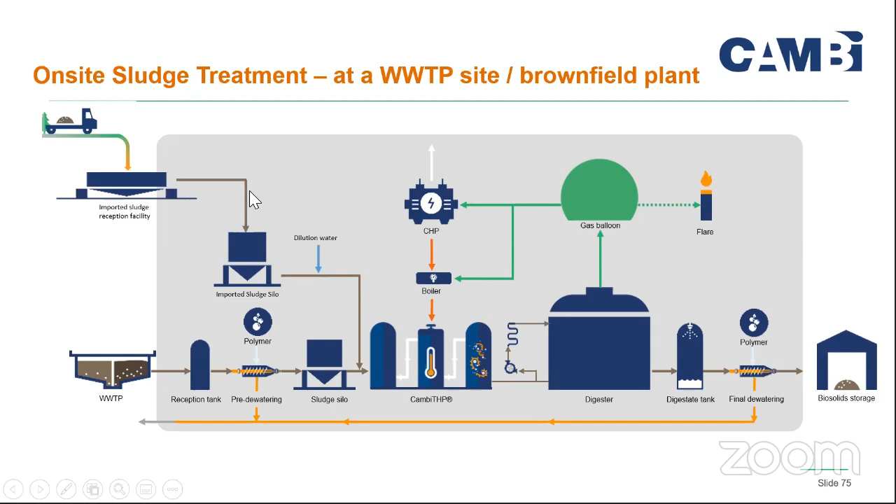And you can see this is another imported sludge. So you have the wastewater plant and the imported sludge comes in. Imported means sludge from outside will come in, and this becomes the on-site one, at the wastewater treatment plant.

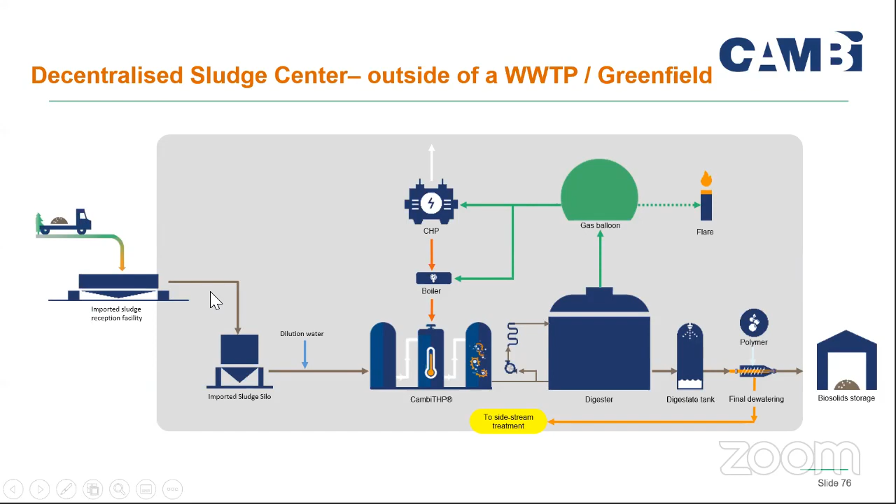So this is the imported one. This is decentralized, meaning all the sludge coming in is from outside. So this is the decentralized one, and it's the same scheme that you have here.

We supply in a modular form, 2 reactors, 3 reactors, 4 reactors. You can add on. You can start off with 2 reactors, and after 5 years, you think, okay, I need more, so you just put in 2 more reactors. You are done. That is a big advantage of THP modularity.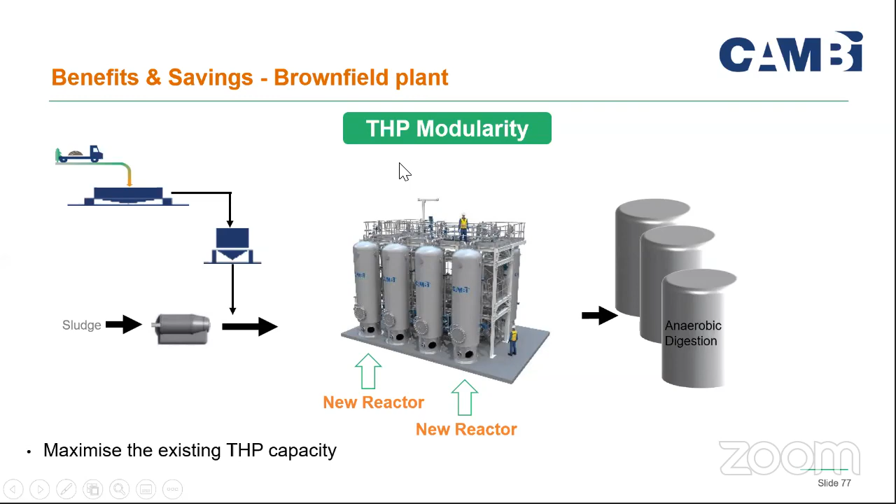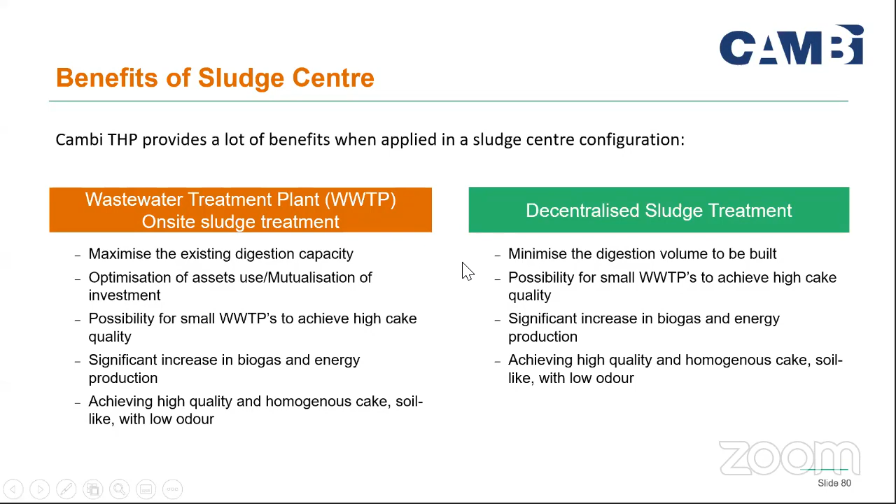These are some pictures of the on-site sludge centers. These are some of the benefits of sludge centers. It maximizes the existing digestion capacity, and allows possibly small wastewater treatment plants to achieve high cake quality. These are advantages and disadvantages you can read.

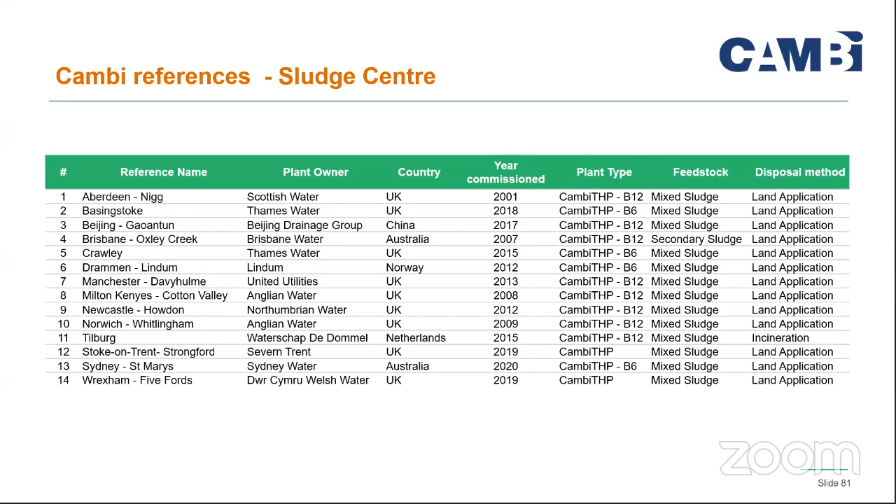We have about 14 plants doing sludge center work in different parts of the world. These are the references. So far we have 67 plants of various capacity, and the amount of sludge we treat is equivalent to 76 million population.

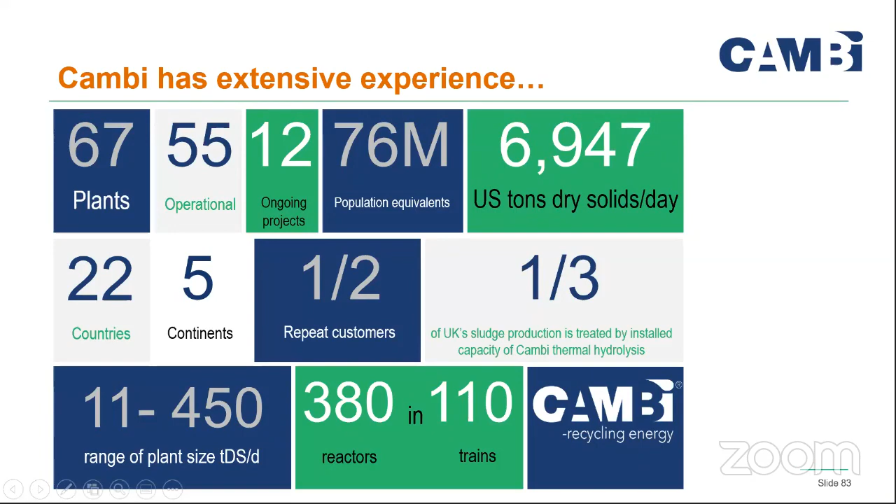We have plants all over the world, particularly in capital and large cities: Beijing, Washington DC, London, Singapore, Dublin, Oslo, Brussels, and many other cities, and in South America. Our clients have been most of the leading utilities like Anglian Water, Severn Trent, Thames Water, United Utilities. Suez also has done work with us.

Hias was the first facility where we installed our first plant back in 1995, that's 25 years ago. That's when we started. When nobody was there, we started this concept. We are the pioneers in the field.

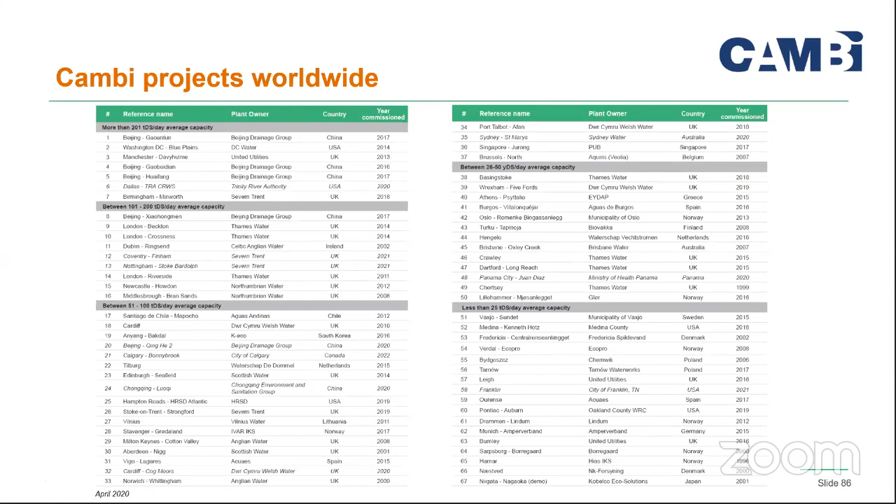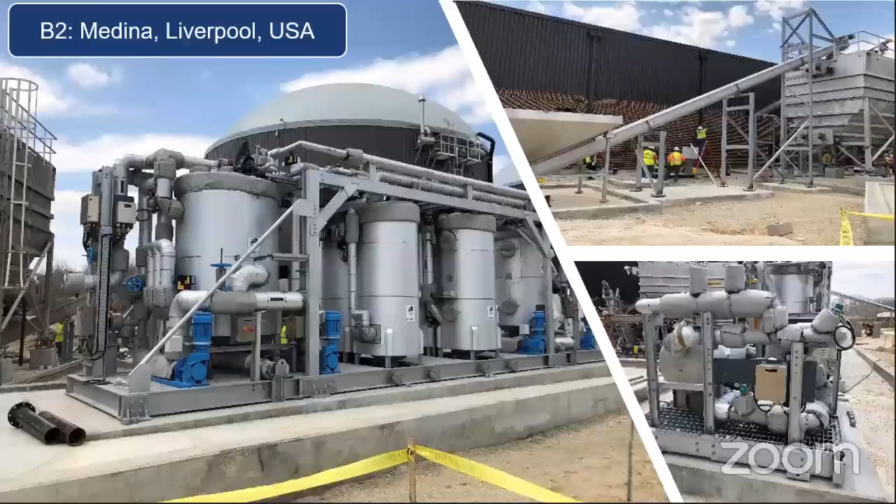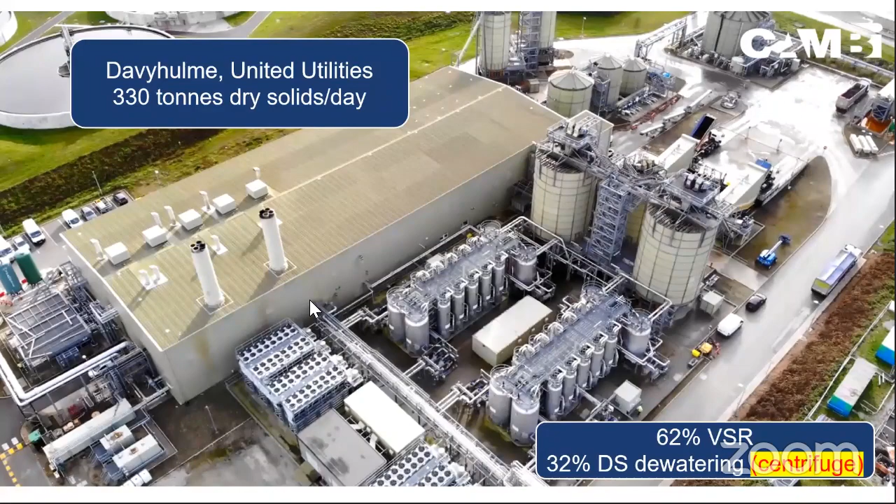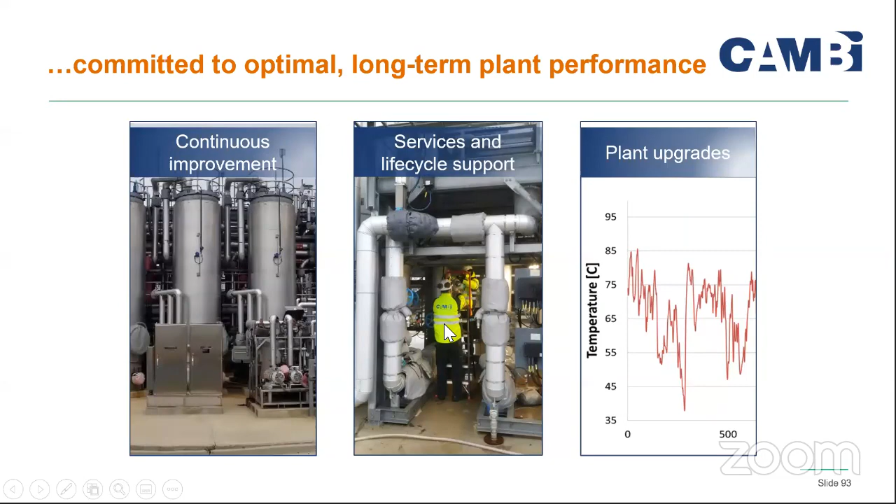For services, we provide continuous improvement services and life cycle support, plant upgrades. We are always there with you to make sure your plant operates properly, because it's also our reputation. So our plants operate without any problem. We also do training, installation, design, ramp up, site services, and front-end engineering.

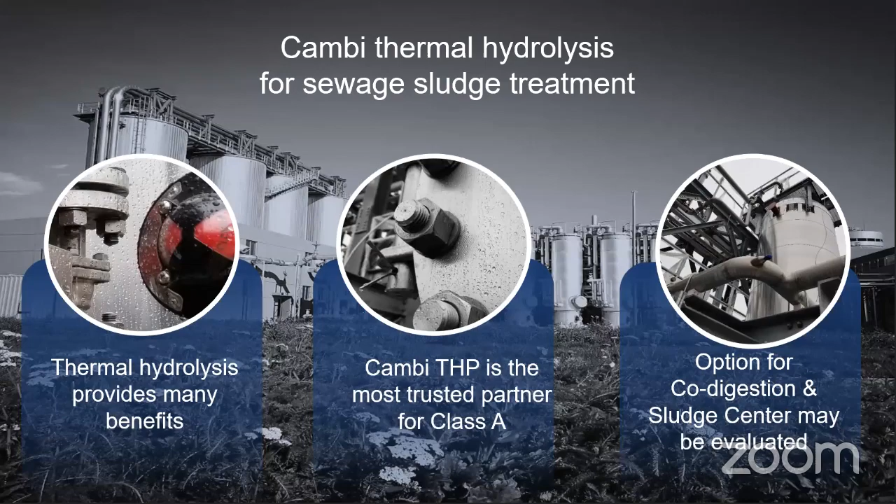So to wrap up, we have 3 takeaways. Thermal hydrolysis has many benefits, which we discussed. Cambi THP is the most trusted partner. And we can also look for options for co-digestion and sludge centers wherever possible. With that, I thank you.

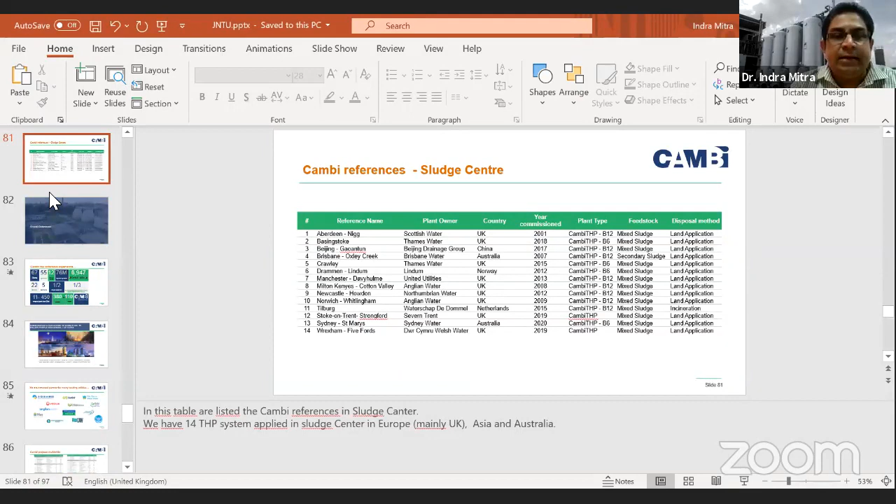Mr. Raghavendra is asking, is it possible to introduce co-digestion in an existing anaerobic digester system in sewage treatment plants? Yes, the answer is yes. In fact, we have upgraded a lot of existing plants without touching them. The digester operates as it is; it comes outside and gets plugged in.

Mr. Prasad is asking, are there any Cambi plants in India? No, but we will soon be having them. Right now, no.

Mr. Sandeep Kumar is asking, recently emerging pollutants have got the attention of researchers. In municipal sewage sludge, there are a number of emerging pollutants like pharmaceutical compounds, cosmetics, and heavy metals. As you mentioned, THP is also capable of fixing heavy metals and antibiotics. Can you please explain the mechanism?

Our objective of treatment is different. What you are talking about, these emerging pollutants, is yet to come to India—that is mostly in developed countries. We just last year got limitations on sewage treatment plants for BOD, COD, TSS, and these limits, which developed countries had about 20-25 years ago. So we are just at the first stage, and now they are also looking at plastics, pharmaceutical compounds, PFAS, endocrine disruptors, and antibiotics, looking at their fate.

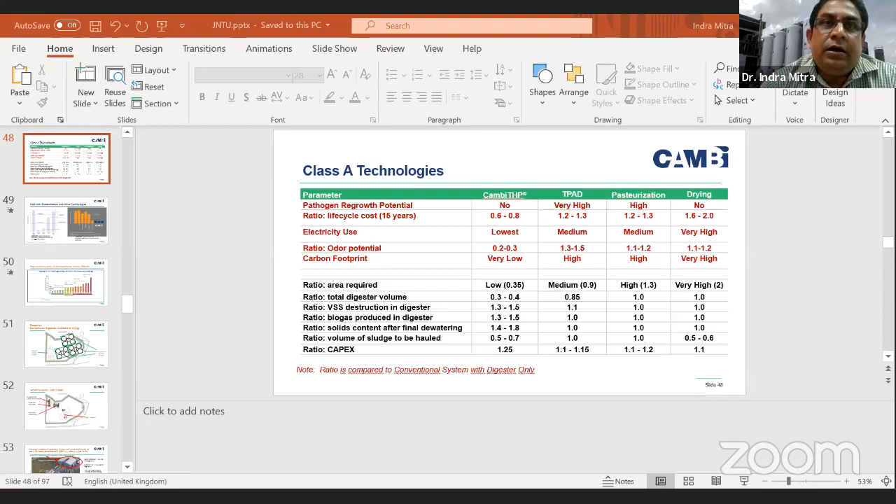For our system, we have not specifically looked at the fate. We are looking at it, but we need to do studies before we can say these are being taken care of. Since it is at 160 degrees centigrade and 6 bar pressure, our feeling is that you are basically taking care of everything—that's a lot of temperature and a lot of pressure. But still, we will not comment until we get the research study done and find out the fate of it.

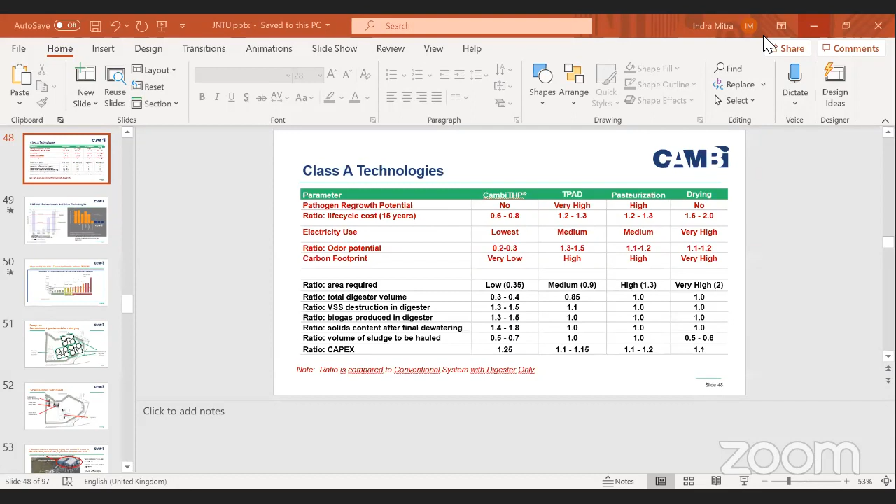Yes, there are constraints, but there are also encouraging replies. First is educating the people—this is a technology which is changing the world, and to do something, first you have to educate the people. This is exactly what I'm doing. I joined this company about a year ago, and in one year we saw a tremendous response, beyond expectations. People here are very excited and want to do it, and some municipalities say, we want this technology.

At the end of the day, this technology gives you 100% compliance, so you can sleep in peace. That's the most important thing—don't take too much risk, at least have a good sleep. That 100% compliance is very important. There are other technologies which have not shown 100% compliance, meaning many facilities using those technologies have not achieved Class A requirements.